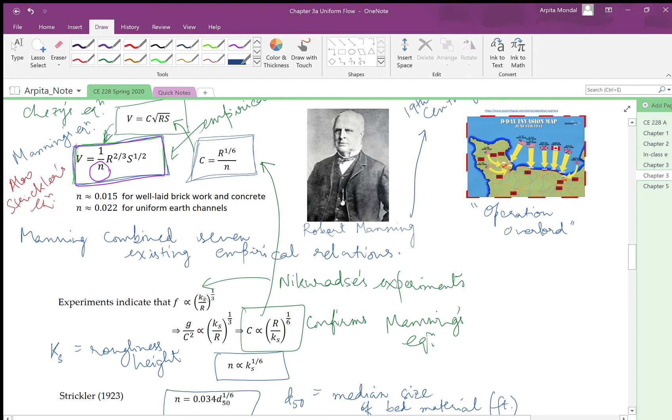Now, the way we had noted this equation in the previous video, this hydraulic roughness was purely because of the hydrodynamic roughness. However, in real channels, whether natural or man-made, the roughness coefficient N is also influenced by conditions such as whether or not vegetation is present in the channel, whether or not there are bends, meanders, or several other types of obstructions. Depending on all these factors, the Manning's roughness coefficient has to be carefully chosen for a real life channel. So let us look at some of these factors which influence the choice of N.

Those can be irregularities in the channel cross section. So when we have large irregularities, this implies that the Manning's roughness tends to increase as compared to a smooth channel. If we have obstructions such as non-living obstructions like logs or other pieces, or vegetation, for both these cases, presence of these obstructions tends to increase the value of Manning's roughness coefficient. If we have presence of bends or the channel meanders, then also the Manning's roughness coefficient tends to increase.

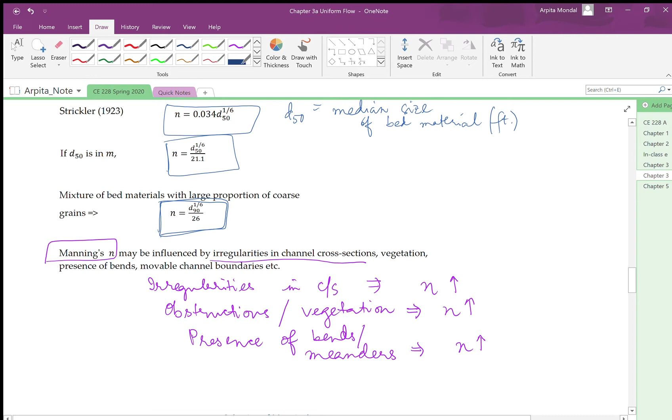There's one more point that I need you to note here. Manning's roughness coefficient N in real life also depends on the existing flow conditions within the channel. Typically, if we have larger depths and discharges, even in the same channel, as compared to the situation where the depth and discharge are smaller, the Manning's roughness coefficient tends to decrease. So when we have more flow, more depth within the channel, we expect the roughness to be lesser than what we would expect if the flow is lesser.

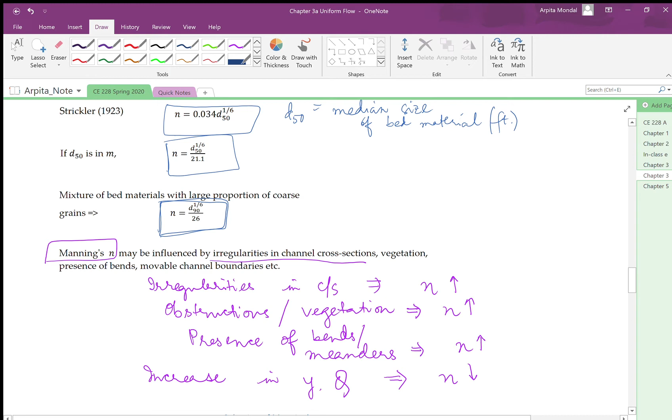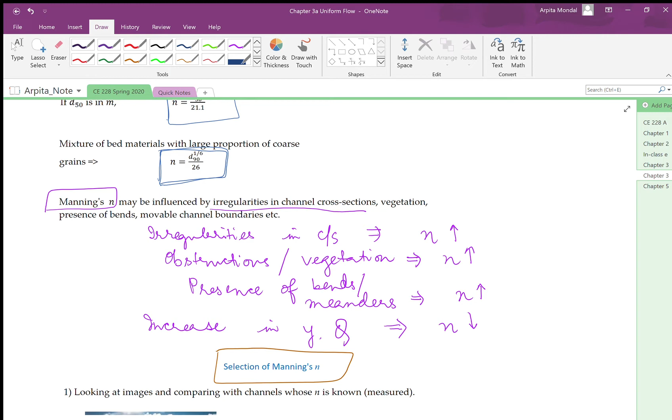Alright, so what can be some of the guidelines to choose a precise or correct value of Manning's roughness coefficient? And here there are certain guidelines available. The first one is using pictorial representations. So by observing real life channels of different shapes and sizes, and within each channel, people observe different depths as well as discharges. And then a library of sorts is created with many images, such as these. So we have a library of images, and for each of these channels, N is measured.

Now, when a field engineer goes to the actual site of concern, so this is the channel under consideration. From the image it is hard to see, but this is roughly a trapezoidal channel. So we have this slope here, followed by the horizontal, and then another slope. So if this is the channel of my consideration, then I would note the characteristics existing in the channel, and then I would refer back to the library to see which of these already measured and well observed channels correspond to the channel under consideration.

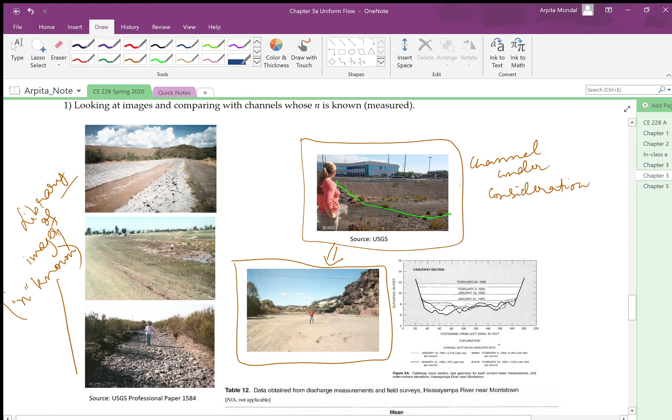And in this particular case, this is found to correspond to another channel for which the channel cross section, the different depths of flow, as well as the hydraulic roughness properties are all measured. And so, referring back to this image, this is my reference channel now. Referring back to this channel for which these properties are known, we estimate the Manning's N for the channel under consideration. So from the reference channel, we extrapolate the value of Manning's roughness coefficient for the channel under consideration.

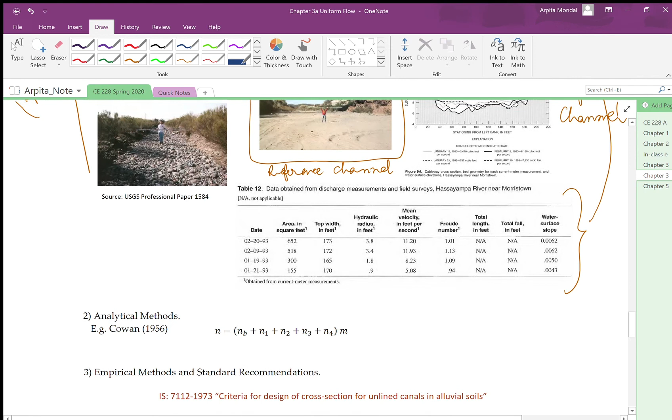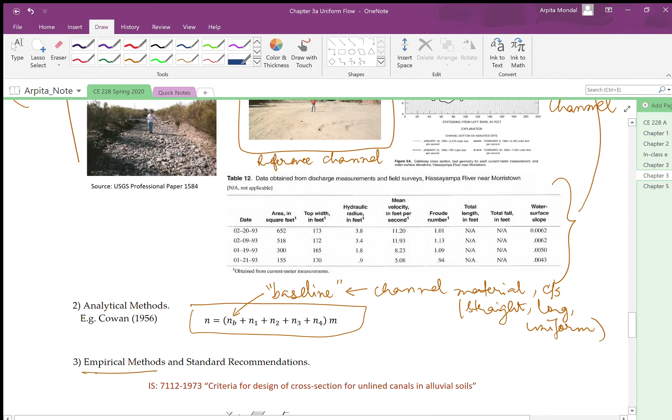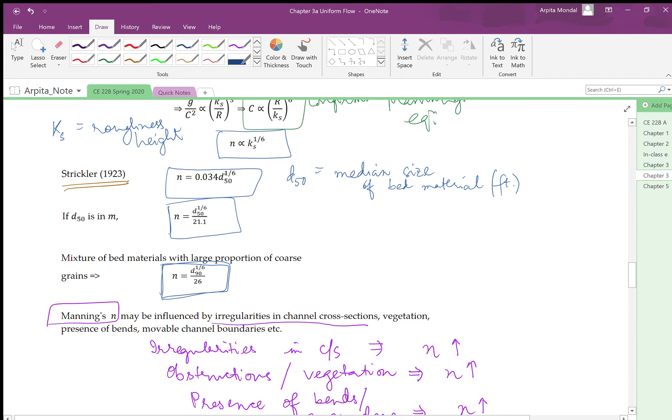There are other existing methods to estimate the value of N for a given channel, and those are analytical methods, for example, the one shown here. So NB is actually the baseline Manning's roughness, which means it depends on the material and the channel cross section, and this is what is governed by channel material and cross section, assuming that the channel is straight, long and uniform. And one such empirical method for calculating NB we had already noted earlier, namely the Strickler's. This is an empirical equation where the Manning's roughness is related to the median grain size of the bed material. So likewise, you can use other empirical relationships to arrive at the baseline roughness coefficient.

Now to this baseline value, we add some correction factors. The first one is changes in cross section. The second one can be obstructions. Vegetation, and so on. And we also use a multiplicative correction factor. This is for meanders. So we can apply all these correction factors to the baseline value to arrive at a more precise real-life estimate of the Manning's roughness coefficient.

There are some guidelines which are established as industry standards also. For example, the Bureau of Indian Standards has a code, IS 7112, and this is particularly given for irrigation canals in India that are unlined. So for unlined canals in alluvial soils, this BIS code suggests some criteria based on which one can select the Manning's roughness coefficient.